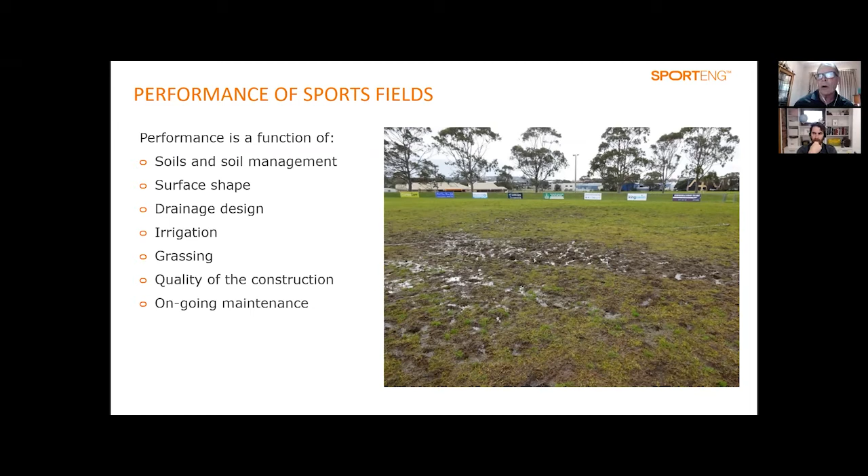So because my background is originally soil science, and the more I've looked at turf and sports field construction, golf courses, racetracks, whatever it is, the soils are very much the foundation for high quality turf. Probably the vast majority of projects that I see that fail, it's usually a failure around the soil selection.

Now, we want our soils to do a number of things. It's got to hold some water for us, and that's becoming a bit of a pinch point, particularly with sandy soils. If we're not going to hold enough water, we're going to have a site that's going to be a little bit difficult to manage from an irrigation point of view. We need a high level of soil aeration. As you can see on that slide on the right-hand side there, we want a deep root system so that we can exploit moisture from the full depth of the profile. Now that's going to be in part affected by the aeration porosity of the soil that we select, but also how we manage our irrigation as well.

We want a well-drained profile. We want one that's going to resist compaction. We want a profile that'll support our good, strong root growth. We want some nutrient storage, but that's probably a bit of a distraction at times. Sometimes we just have to accept that we have to modify our fertiliser programs to meet the requirements of the particular soil type we select. And of course, it's got to be suitable for the playing surface.

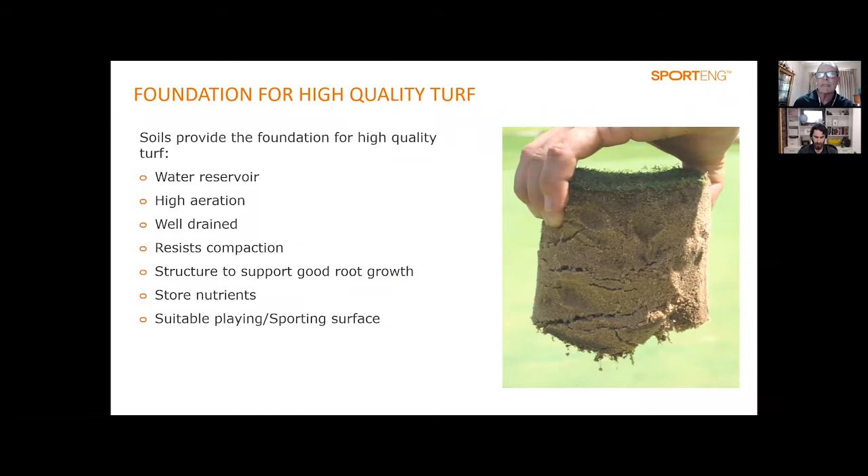So if I was going to pick one single element out in terms of when we're looking at our soils and what we're trying to achieve, drainage is very much a key criteria, and then followed by moisture retention. So one size doesn't necessarily fit all, and over many years of having to deal with a multitude of different clients, different localities, we can't necessarily have one template that's going to fit all circumstances.

And often we need to ask ourselves the questions, what are we looking for? Is it going to be a high use facility? Do we need a firm surface? Has it got to be fast and bouncy like for a cricket wicket? Do we need it to be well drained? And of course, this changes a lot depending on what the actual sport is. When we're looking at sports fields, good drainage rate and good grass growing conditions tend to be our key parameters. And usage. That's a question that's often asked, particularly in the local government area.

What's the projected usage? Now, for new sites, greenfield sites, new subdivisions, often the early usage is going to be quite low, but sometimes we need to be able to project forward and think, well, as this area grows and the usage increases, what sort of numbers of hours per week can we likely expect? So that takes a little bit of work and thought in terms of projecting into the future, but it does help in terms of understanding what's going to be constructed so that it's going to sustain that level of use.

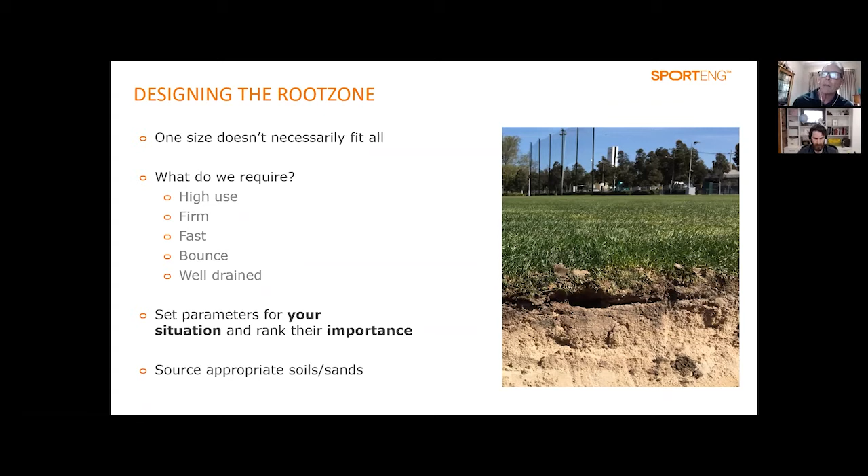And at the bottom of this, there's sourcing appropriate soils and sands. That is, again, a challenging one. And Queensland is certainly in that category, that what we've had to utilise at times doesn't fit what we consider to be the perfect scenario as to what we might read in the books. But we look at some very key criteria around drainage and moisture retention, so that we're going to create good growing conditions for our turf, even if it doesn't fit what you might read in the book, but it's going to be the best material that's available locally, because obviously there's going to be cost issues as well.

So with our profile options, we've probably seen a number over our lifetime, and we've seen a number that fail. Our soil-based profiles, our sandy loam profiles, have often been the stock standard for probably the last 30 or 40 years. We've moved more and more into sand profiles, and they have different levels of sophistication. We've got our sand gravel profiles, which is sort of our elite profile, and the more conventional sand profile. We're starting to do more sand carpet, and I'll talk a little bit more about that from a Queensland context.

And then we're getting into the very high level fields where we have reinforcement integrated into the profile, and also hybrid turf systems, which are a combination of natural turf and synthetic fibres. But we won't be concentrating too much on that today. We're happy to answer some questions in and around those particular applications, but we're going to sit more with what we would typically be looking to design and construct from a conventional or from a local government perspective.

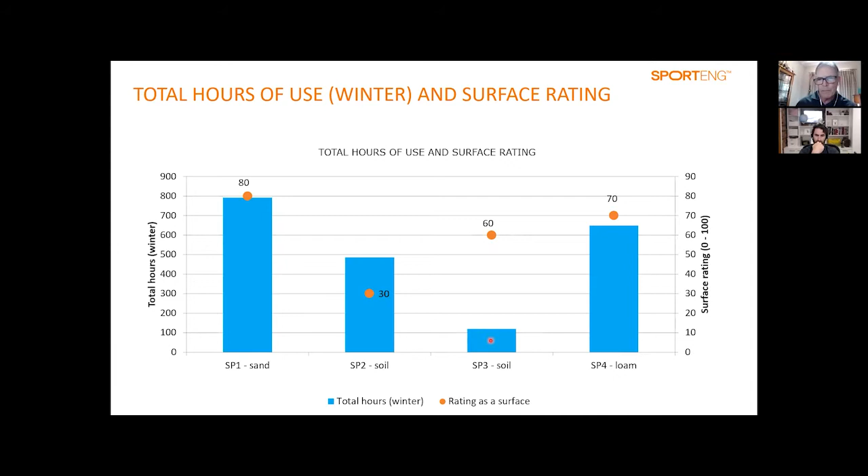This field was actually in the same complex, soccer field, used for a 2nd tier soccer competition. So it needed to be in reasonably good condition. They were very limited in the hours of use because the drainage capability of the field was actually quite poor. So it rated reasonable from a quality point of view. So I just want to highlight those 3 in particular, from sand through to soil, and if you want to maintain a surface, how limited the hours of use are going to be.

So just working through a couple of the options. The sandy loam soil profile, it's interesting how it's typical of older council fields, but we're actually seeing some councils defaulting back to that type of soil type. The basis of their thought process has been really more around we want to hold more moisture, so we need less water for irrigation purposes. Now, that is another whole different discussion. I've written a few papers on it in the past. It's not really quite accurate, okay?

So if we have a sandy loam soil, we've got something that's much higher in silt and clay. It has poorer water infiltration and drainage. So one of the really key criteria of having a high level of playability is lost. Subsoil drains are quite ineffective because it's not possible to get the water down through these siltier clay type soils and taken away efficiently, unless it's combined with an extensive series of sand slit drains. So the hours of use are around about 10 to 15 hours per week when dry.

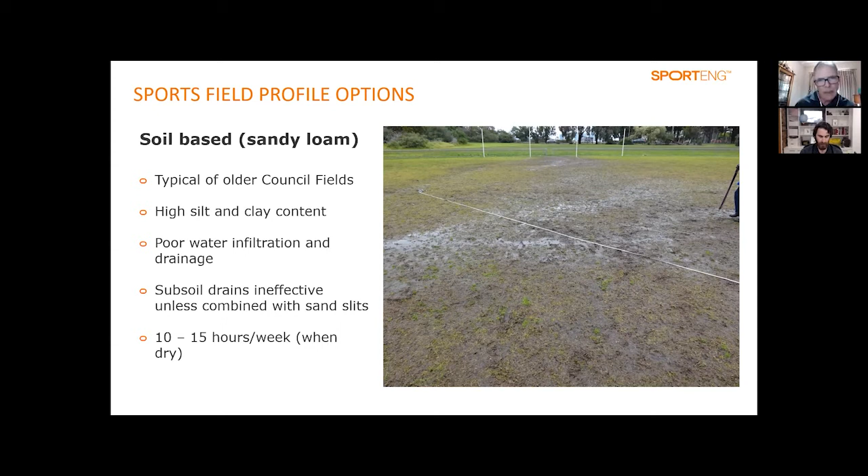But as you can see from the slide, the picture on the right-hand side there, they can turn to mud very quickly. So what happens is we start to lose the quality of the game, the skills are affected, and this is something that often comes back from the user groups, where they're trying to teach the skills of soccer or rugby or AFL. If they've got poor quality fields, it's very difficult to enhance those skills. So hence we're looking for much drier profiles.

Our default sports field profile is sand-based. So we've got excellent water infiltration and drainage. We've got good resistance to compaction. We've got really good growing conditions for our turf, so we can get a really good, deep root system developing. One of the negatives that's put forward a little bit is nutrient leaching, probably the main management challenge.

I think that often conflicts a little bit with the selection of fertilisers and often a movement towards high price products. So there's a budget limitation on how much fertiliser you can put on, and they're not necessarily compatible with a sand profile. So again, that's another area of management and how we can maintain these fields with lower cost fertilisers with a little bit of a spoon feeding approach.

So sometimes it does take a little bit of change in management strategies, how these profiles are maintained to optimise their performance. Low water holding capacity, again, is often thrown up as a negative. It's droughty, it's going to need more water, etc. That perception is really not quite correct. We need to understand the principles and irrigate accordingly.

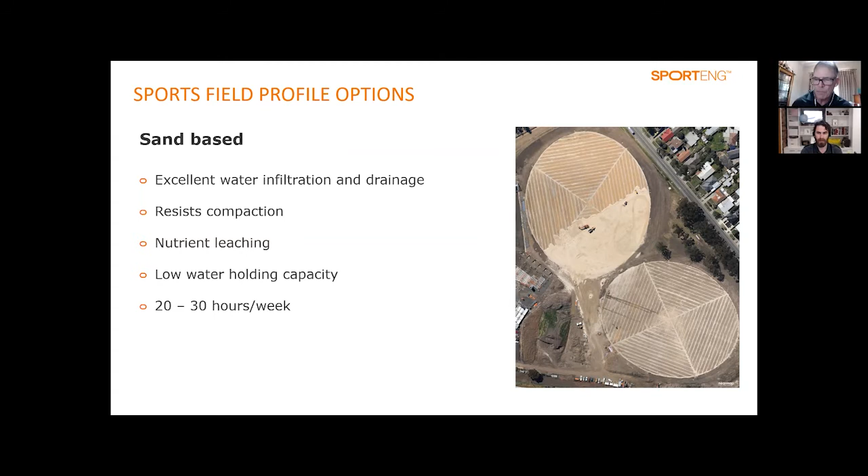When we get to our more elite level, our sand-based, what we call our perched water table profiles, that's where we have a gravel drainage blanket over our subsoil drains, and then we have sand over the top, so we have excellent water infiltration and drainage, so it's highly efficient.

The perched water table, we tend to get a little build-up of water at the interface between the gravel and the sand layer, and I'll talk a little bit more about it in the next couple of slides, which actually helps store water within a sand profile. So it can increase that water storage by about 30 to 40%, okay? It does require deep irrigations to recharge that little perched water table, but it's a positive factor in this type of system. We have good resistance to compaction.

Nutrient leaching can be a little bit of an issue, but where we've probably found these profiles to be very good, not only for elite usage, but also on capped landfills, or where we've got contaminated soils where you're not allowed to excavate into those layers. So we can actually use flat drainage pipe technology, gravel layer over the top, and then our sand backfill without intruding into those soils that we don't necessarily want to have to deal with.

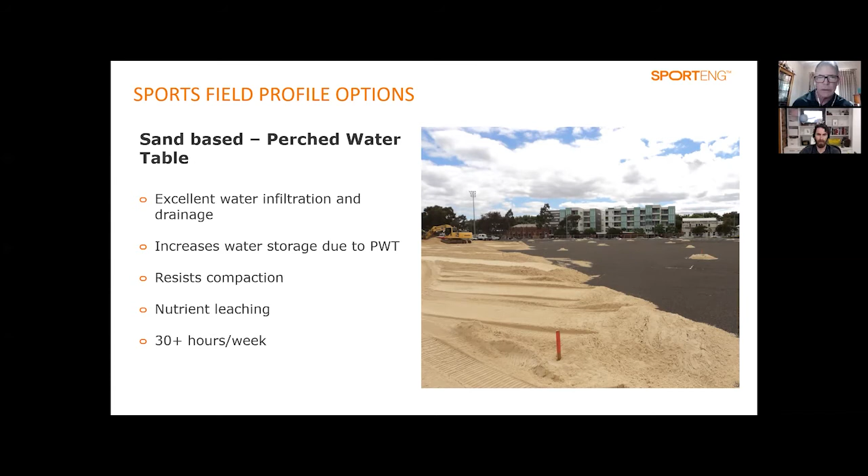I've put up sand carpet profiles because of cost restrictions. There has been a tendency to work towards shallower sand profiles. I'm not totally convinced that they're suitable for Queensland, but just putting it in there by way of an example. We've had to do some work in northern New South Wales. We've had some restrictions around site conditions and also budgets.

So we can create a shallower sand profile, but it needs a very high network of subsoil drains, sand slit drains. So in this example, we've got a lot of sand slit drains. They're at 2 metre spacings. We've got a sand capping layer, which is about 100 millimetres thick, then our turf on top. The main reasons: they are lower cost, because you're using a lot less sand in the process. They're very good for difficult sites.

So we've implemented these in sites where they might be flood-prone areas where you're not allowed to change the site levels at all. Also in places where there might be something like acid sulfate soils, and certainly having done work in Queensland, acid sulfate soils seem to be something that pop up quite regularly. Also for sites, again, where there might be contaminated materials that you don't want to excavate into and have to dispose of. They are a shallow profile and might be a bit more challenging to maintain from an irrigation point of view in the Queensland environment.

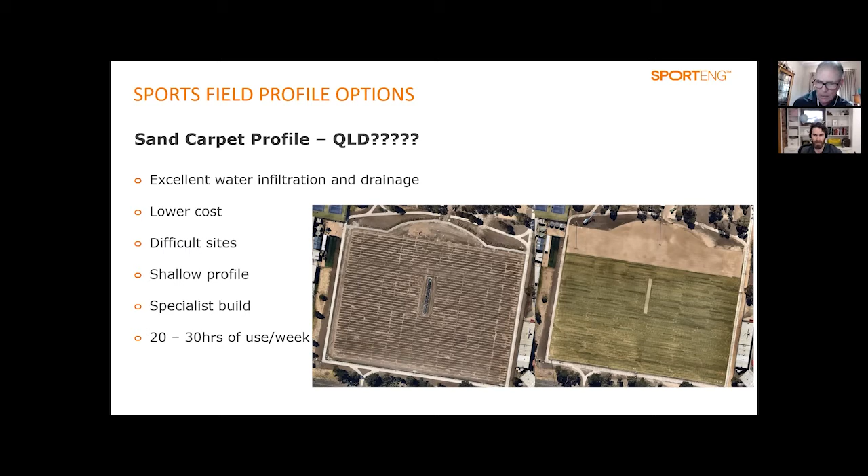And just last couple of slides here around sand selection and sand depth. Sands can be challenging to get the right sand. Not all sands have the same physical attributes, and we must test. And quite often there's a selection of sands. People will select sands, bring sands to site, but there's no testing to support whether it's going to serve the purpose or not. So we always recommend testing for particle size, moisture retention, aeration porosity, drainage rate.

And then during the construction process we have a very detailed quality control program where we're testing every 500 cubic metres of material that's going to come into that project to make sure that what's specified actually comes to site, and also reinforcing that this is a specialist area of testing and it's important to use an accredited laboratory, a laboratory that's got a track record of dealing with materials for sports field projects.

Again, one of the challenges across the local government area that we've found, and particularly where budgets are a constraint, sometimes there may be an arbitrary decision to reduce the depth of the sand profile. Okay, so every sand type has its own particular characteristics in terms of moisture retention, aeration and drainage.

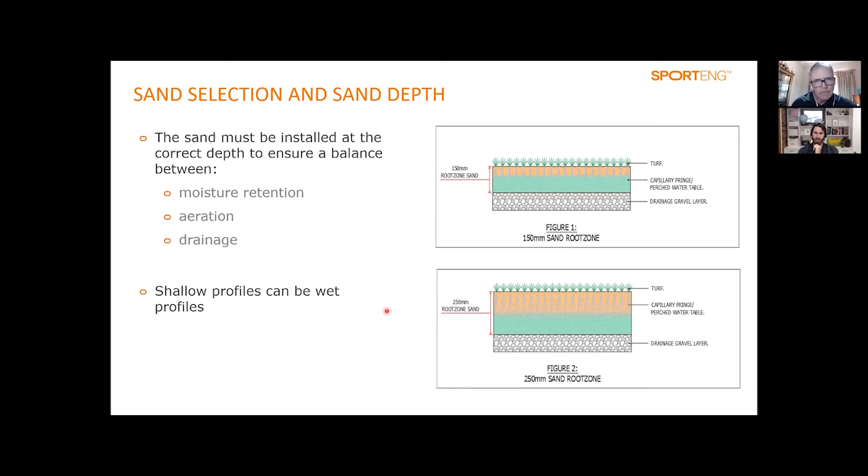Now, if circumstances dictate that we could only have a 150 millimetre deep profile, maybe because of cost, we have to make sure that we look for a very specific sand type to make sure that we avoid this lack of good aeration and water movement up into the upper root zone. So we don't want to make arbitrary decisions on the depth of the profile. It has to relate back to the sand selection and doing our testing and our homework before we finally specify a particular project. Okay, I think that's pretty much all for myself.

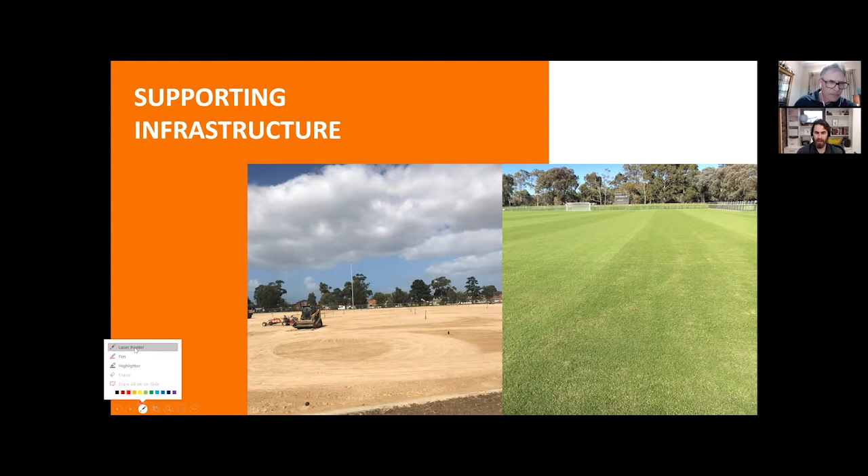I'm going to hand this back over to Jared, and he's going to talk a bit more about the supporting infrastructure. Yeah, thank you, John. Yeah, so now I'll just talk through two of the key infrastructure elements that support the profile, being the drainage and the irrigation. So drainage, the principles around drainage are pretty straightforward. It's effectively removing the water from the surface. So you want to get the water away from the crown of the plant, away from the foot traffic, so that you don't damage the plant.

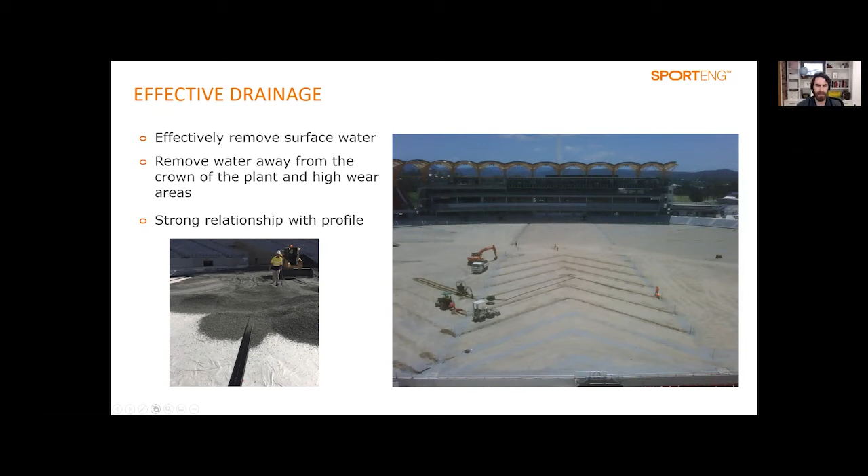The second part is probably the most important one of the two, which is around the efficiency of the irrigation. So having an irrigation system that distributes water across the surface evenly and can be controlled. So uniform coverage, one of the key things we look at is particularly around the head-to-head coverage. So the fact that the sprinklers throw from head to head. Uniform pressure and flow is critical to maintain that uniform coverage. Flexibility is something that's often overlooked at a council level, the ability to have quick coupling valves around the areas to irrigate particular areas due to high wear.

If you don't have a valve in head, you might need a more localized control system. So having quick coupling valves allows that ready access to water in localized areas, and might be a separate system around the wicket block. As John mentioned in his presentation, the ability to control these, the technology is there. You can control it from sitting at home. Obviously, it helps to get out there and see the efficiency of it. But the technology is there for you to use.

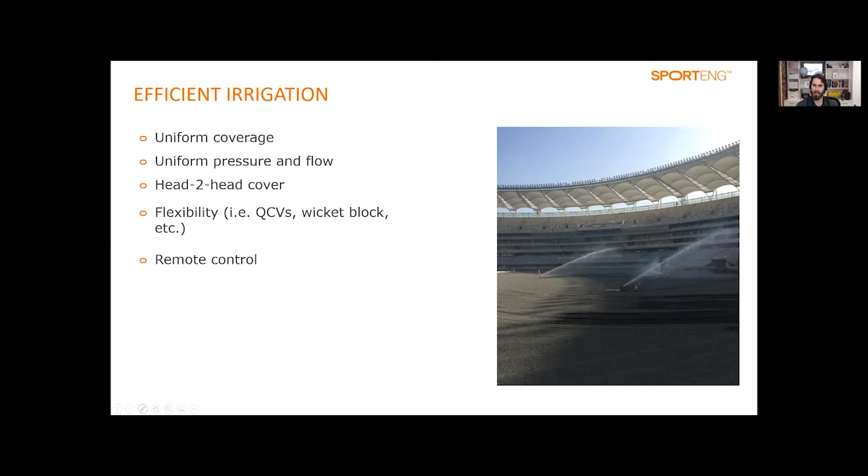And one thing in relationship with John's point about the profile, having moisture sensors is something we really try to emphasize with clients. It's not just something that is used for elite facilities. Having moisture probes built into the profile where you can monitor your application and the depth that it's getting into. As John said, if you do go with the sand profile, you're looking at trying to get some deep irrigation and retaining it at depth so you don't lose it through evapotranspiration. So the ability to monitor that moisture in your profile is key.

And I'm just going to step through a couple of sustainable design options that could be considered in your designs, that could complement it and really make a positive outcome for the environment. I guess when we start talking in the environmental realm, nothing comes easy. It usually does come at a cost, or it's a new technology that people need to understand. But once we make that step change, you start to see that value and return on the effort.

How to green your natural turf field of play. Sometimes it does challenge the status quo, and I know John's butted his head up against numerous curators along the way who are stuck in their ways and have continued to do things because that's how they've always done it. A lot of things that John's mentioning and things that we can mention in regards to the maintenance side of things, it's not new. It is readily used.

Challenging what is being done sometimes is one of the first hurdles to get over. Some of these things are quite simple to include and can improve the outcome. They do have a proven track record. It's all about being eco-efficient, so finding ways to be efficient in the way that you're applying, designing, constructing, whatever it might be. It's all about being efficient in your application.

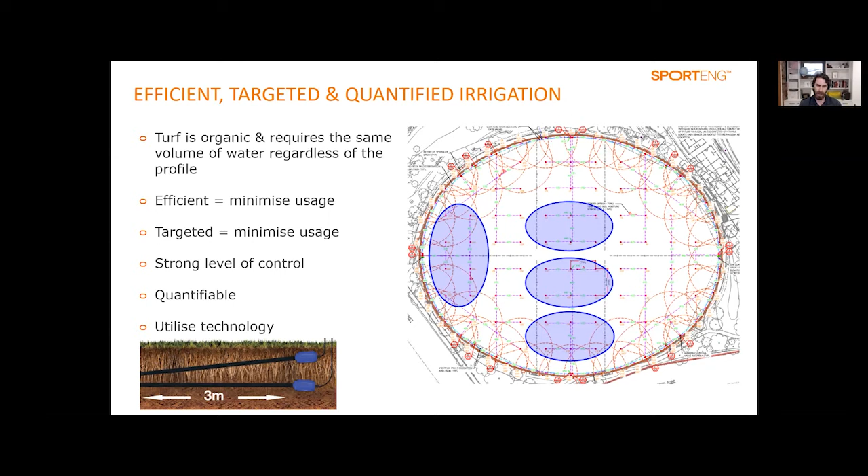And use technology, as I mentioned earlier, having those soil probes in the profile, which is that image at the bottom there. We often specify a 3 metre long probe because often if you've just got one of those small spot probes, you may not be getting the true representation of the profile. So having a longer probe really gives you a good feel for the moisture in the profile.

Something we've been doing a lot is trying to understand what you've got before you throw it out. So whether it is, as John alluded to, doing some testing of your existing growing medium to see what it is and whether you can utilise it. So this is harvesting soils at Lathlain Oval, which is a West Coast Eagles training field. We identified the existing soils on site could be readily utilised as the growing medium. Similarly at Fremantle's training ground, we did the same, where we actually had to stabilise it because the soil was a bit too rounded in particle size. But understanding what you've got and seeing if you can use it before you throw it out can obviously be a good, sustainable outcome.

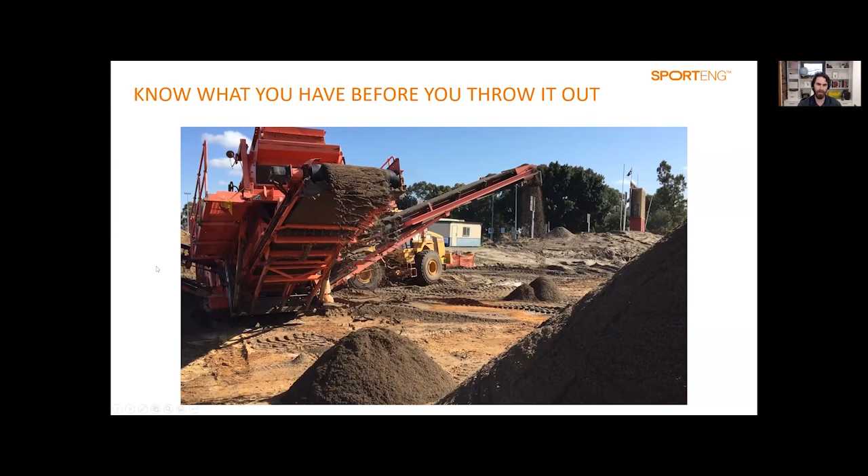This is an interesting project that SA Water have done for the last couple of years over in Adelaide. Initially, it started off at Adelaide Airport, and then they moved to testing the ambient temperatures around their sporting fields. As I mentioned, it started at Adelaide Airport, and they wanted to see, if they were to irrigate their green fields around their runways, what the overall efficiencies to the greater environment would be. And they found that by having their grass around the runways green, they helped lower the ambient temperatures by about 3 degrees, which actually optimised mechanical operations, not only of the planes, but also of the air conditioning within the adjacent takeoff lounges.

And then SA Water started looking at that further and thinking, okay, how does this impact the community? And they started putting all these heat sensors around the community and adjacent to natural turf fields, synthetic fields, acrylic courts, hard standing, and trying to understand on certain days what the implications of having well irrigated fields were. And obviously in the Queensland market, you've got a lot hotter areas.

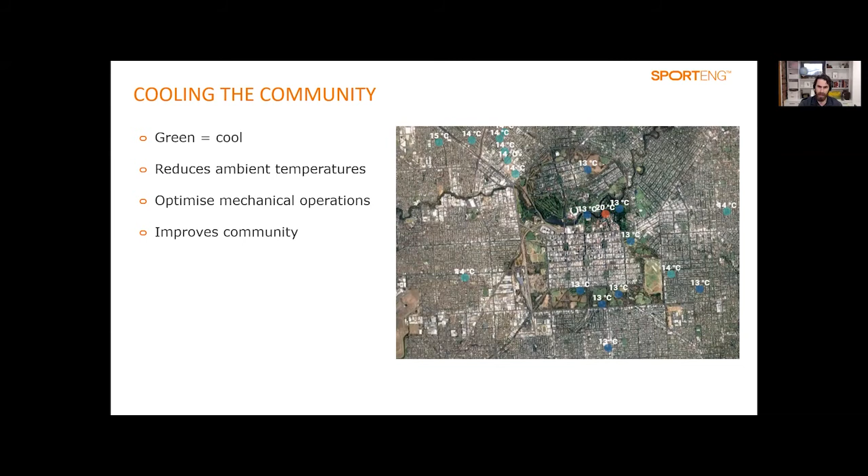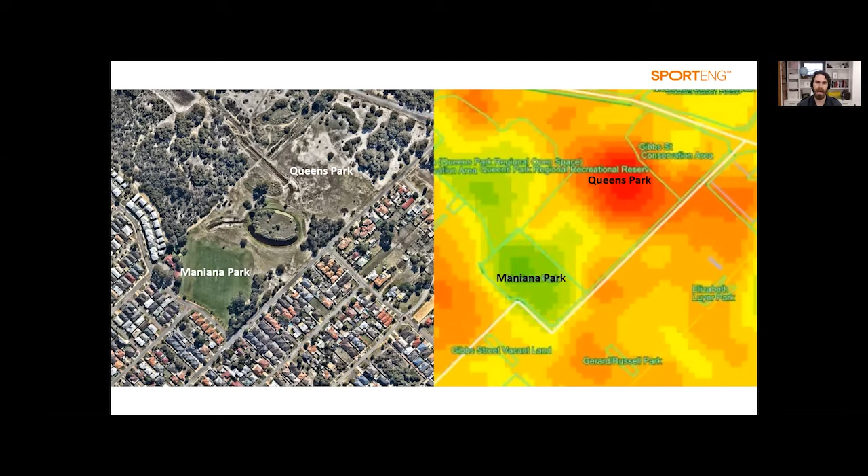And similarly in WA, which is another project we're working on, you can see Maniana Park at the bottom there; the image to the left is a well irrigated grass field. And then Queen's Park is an unused green space, heavily exposed sand at the surface. And then you can see the heat island effect and the flow-on effect of the heat from those sports fields. So Maniana Park, well irrigated. You can see the cooling effect that has on the residential zones adjacent to it. Whereas Queen's Park, sand gets very hot, reflects the heat, and you can see the downwind flow of impact on the adjacent areas. So again, it's thinking outside of where you're at, not just the field of play, but seeing how that can have a positive impact on society and the community around it.

Finally, something we hear a lot in certain regions is around the value of independence and the advice sought from either sales representatives or product lines. Obviously, know what you have, and then you know what you need. So as I went back to saying around the sands, whether you can reuse the sands, know exactly where you're at with your natural turf field of play, the health of the turf, or what the infiltration might be, so then you can know what you need to improve it.

Often you might be told one thing when you don't need it. So understanding that, and there's ways of understanding that information through ongoing testing, either through performance testing of the surface, so physical testing of infiltration rates, traction, or even just the visual observation of the turf coverage, and then you can get turf health checks on the grass itself. Take samples of the grass leaf and test the health. Knowing that information then helps you understand what you need to apply to get a better outcome.

And the right advice can save you a lot of time, effort, and money. And I think the effort's probably one that is often overlooked. Time and money are probably self-explanatory, but the effort sometimes to apply these things where it may not be needed can be time-consuming. So, as I said, understanding what you've got, seeking out that independent advice is critical.